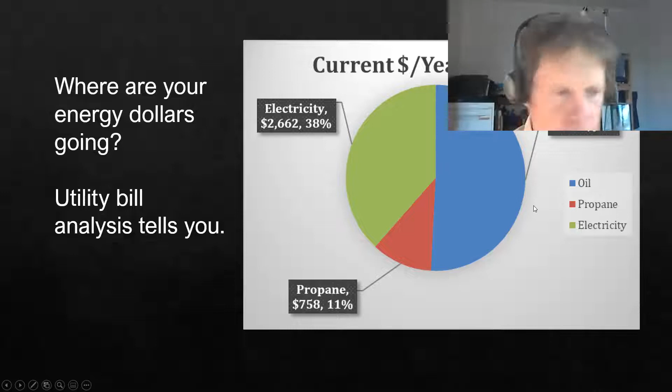Electricity in Ontario is pretty good. It's not too much carbon involved in making electricity in Ontario. There is some. So it's really the fuel of choice for the future for everybody. We're going to have to electrify everything to reduce our greenhouse gas emissions. But as a group, you're going to have to decide what weight you want to put on environmental factors as you're deciding about a building.

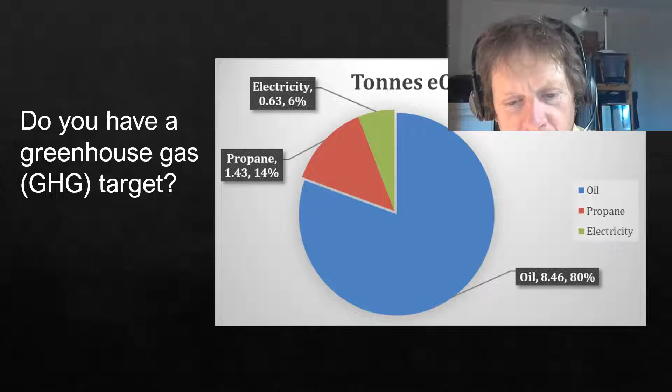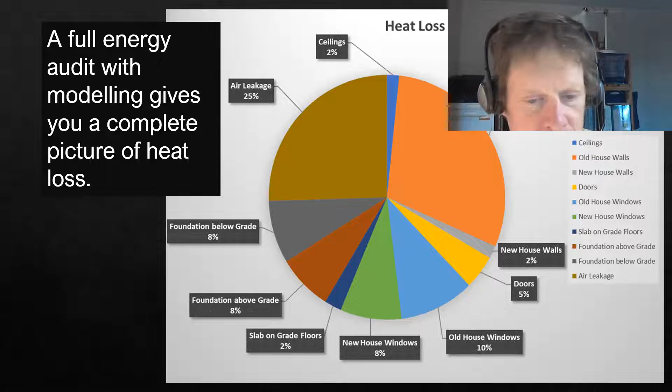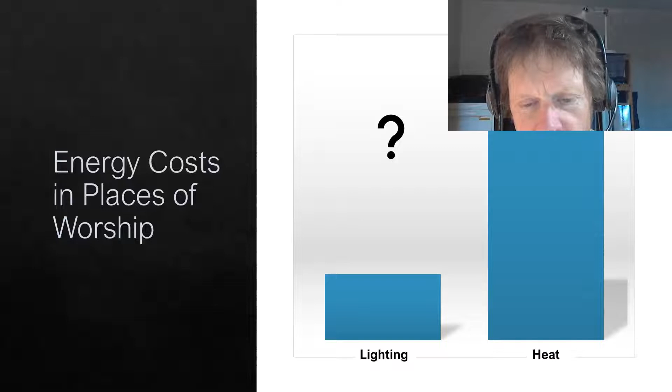Lighting and heat. So most of our electrical loads, unless you're heating with electricity, will come down to lighting. Most churches that I've seen recently have already had quite a few lighting upgrades. There's been some great programs for lighting upgrades in the past few years, and we're not seeing, for the most part, huge lighting loads. If you've already got LED lighting in most places, you're pretty much at the finish line as far as reducing electrical loads from lighting. If you still have incandescent lighting, then there's plenty of opportunities to make changes.

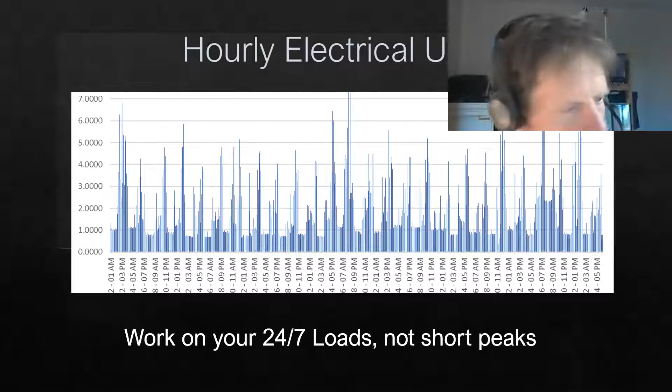One of the great things that you can get these days from your utility bills is a tremendous amount of data. For most utilities, certainly Hydro One, you can get hourly data that shows your electrical consumption hour by hour. So here's an example. The numbers on the left are kilowatts, and we've got a bunch of days here. I don't know how many days. I think every time you see a bump, that's a day. So we've got a couple of weeks here, I think.

You can see that the loads never go below maybe 800 or so, so like 0.8 on this scale, which would be 800 watts. So this is a building that is apparently averaging 800 watts all night long, and that's a place where you want to put your attention with electrical loads. When you look at this slide, everything that's blue is costing you money. So if you spend a lot of time trying to reduce one of these peaks up here, there's not very much blue in that peak. It's a pretty thin line. It didn't last for very long.

The big money to be saved is down here. So if you can take a slice out of this base load that runs all the time, that's a big savings compared to hunting the peaks, which in the case of a church usually happen whenever the church is occupied for worship. It might only be 2 or 3 hours a week, and that can be a peak. Worry about what's happening all night long, every day of the week, and you can get that not from the bills themselves, but from the websites of the utility companies.

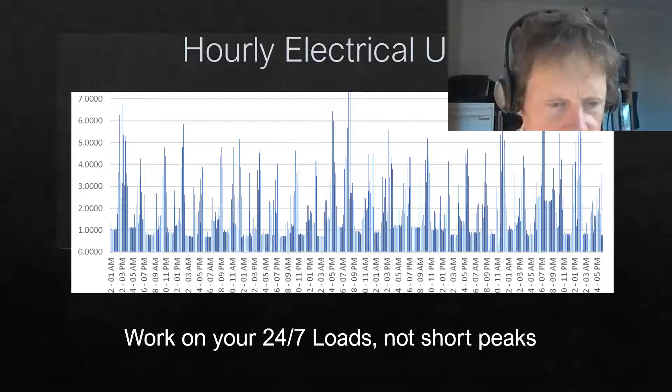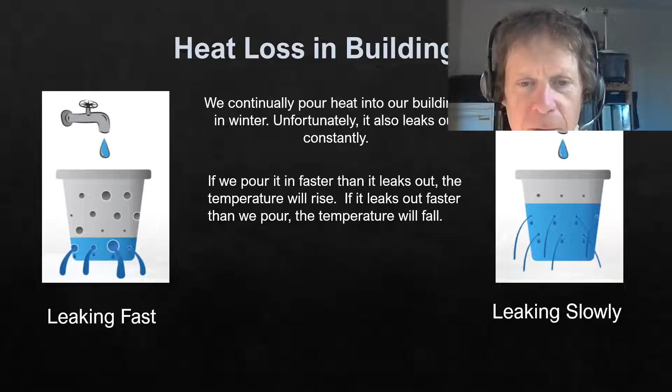Three things contribute to heat loss, and they're all equal in proportions. The surface area of your building that's exposed to the cold, the conductivity of the materials that the building is made of, R value, we say in construction terms, and the last thing is the temperature difference. If you have a big temperature difference between indoors and outdoors, you're going to have more heat loss. But all of these things contribute equally.

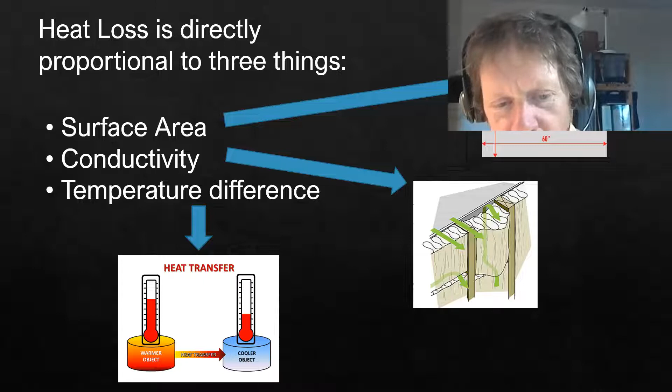They're equally proportional. So this is why setting back thermostats saves us money, because we get closer to the outdoor air temperature. As we get closer, we have less difference between inside and outside, and it takes less heat to maintain that difference. So you can be very aggressive about setting back thermostats, and there is savings to be had from doing that. So those are from thermodynamics. These are the three ways that you lose heat from a building.

Real buildings have a fourth one, and that's air leakage. This is heat that is carried by air. If you have warm air that escapes through the building, through cracks around windows, cracks in the walls, cracks in the floors, there's a million places where it might go depending on the construction type. When that warm air escapes, it's taking heat with it, and that can be, as you saw from the first slide, pretty significant.

Air leakage is driven by three main factors: the wind that hits the building, and the stack effect, which is the tendency for warm air to rise. So buildings will tend to leak outwards at the top, and they will tend to leak inwards at the bottom. If you're near the top of the building, you won't ever feel a cold draft, even though it's leaky, because it's all the warm air from below that's going by.

You may have seen buildings in the wintertime where on the third floor, all the people have the windows open in the apartments. There's something terrible going on in that building. They aren't feeling cold drafts. It's all the warm air from down below that is disappearing out through those windows. And the same is true in real buildings.

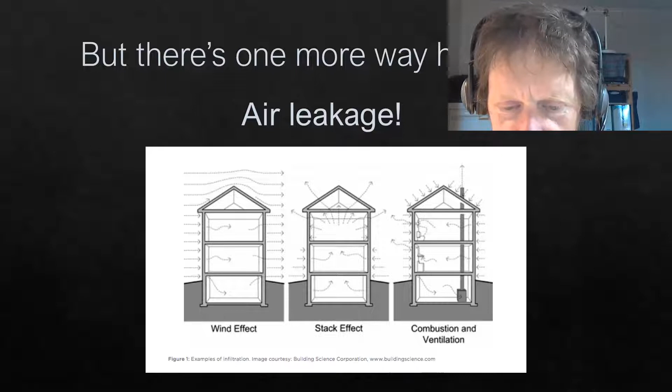The last thing that causes air leakage is if you have devices inside the building that consume air. Well, all of that air has to come from somewhere. And most older buildings don't have intentional balanced air supplies. And so the air typically will leak into the building to make up for whatever is being exhausted by a furnace that uses air, a boiler that uses air, exhaust fans, say in your kitchens or in your bathrooms. All of that air is replaced by air that leaks in. And when it leaks in, it's coming in cold, and you've lost warm air going out.

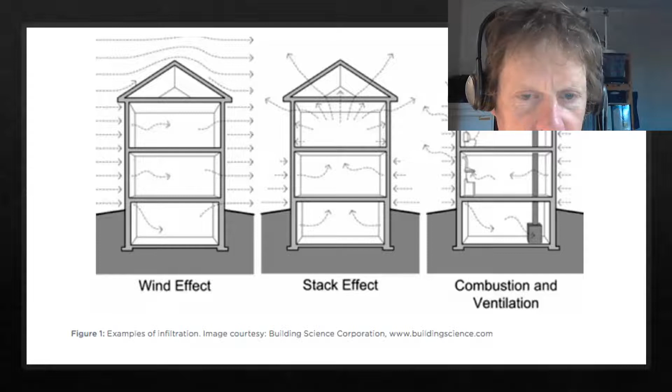It's not expensive to deal with air leakage in many buildings. Sometimes it is, but often the sources are not so numerous, and you can knock it back with foam and caulking and filling obvious places.

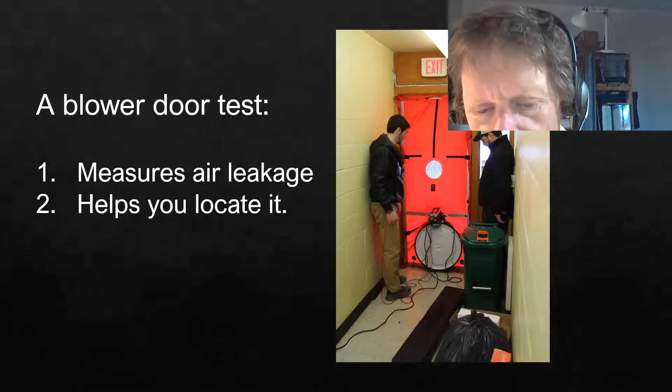I'm hearing some background noise. I just remind people to mute your microphone if you're not trying to speak.

Thank you. So strategies to look at in terms of this. One is to reduce the heat loss. The other one, of course, is to reduce the cost of making the heat. And often in an older building, especially say a stone church, you are quite limited in what you can do to the building envelope. And so at that point, it might be that your money is better spent on coming up with the least expensive way of making heat that you can, rather than trying to reduce the heat loss from the building. And these are individual decisions. There's not a rule of thumb that is going to work for all buildings in this respect. It's just two things to think about. And we're going to do some of each in many buildings.

Managing set points and schedule. Remember that the heat loss is proportional to the temperature difference. So anytime your building is being kept warmer than it needs to be, you're spending money you don't need to spend. Many churches have multiple thermostats. If you can get those all onto Wi-Fi thermostats so that somebody can manage it from home, they can go, well, we've got a group coming in on Tuesday night at 7, I'm going to warm that space up an hour ahead, and I'm going to turn it off when they leave at 8. You can set that all up. There's a lot of money to be saved there, typically, if it's not being managed carefully right now.

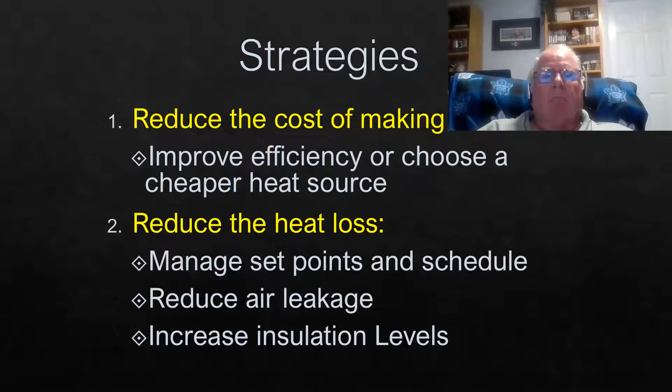And the cost of a Wi-Fi thermostat these days is $120, $150. Don't buy a boutique thermostat like a Nest. You can just get more of an ordinary Wi-Fi thermostat, and if you get them all the same brand, you'll have a dashboard and you can see them all in one place. So managing set points and schedule, the cost of that is very low compared to the return, unless you're doing a beautiful job of it right now.

Again, I'm hearing noise. Please check your microphones.

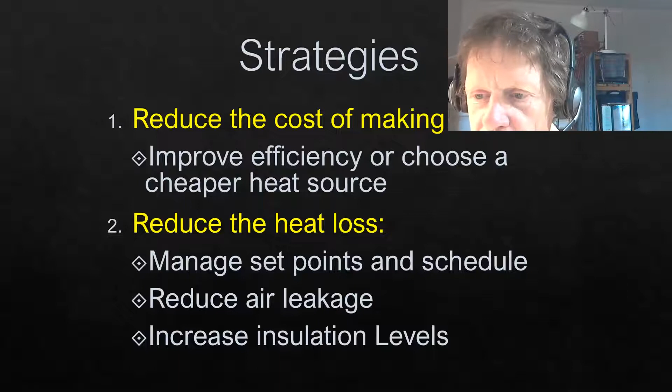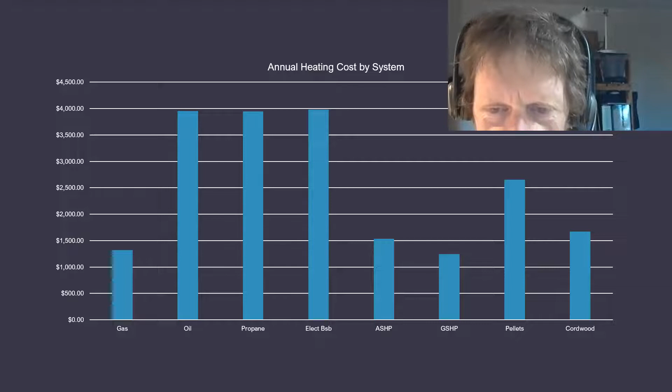Interestingly, here's wood pellets and here's cordwood. Lots of people heat with those at home. Not so many people are heating churches with those things. And the cordwood is about even with the air source heat pump, right? And what a lot of work and mess you have heating with wood.

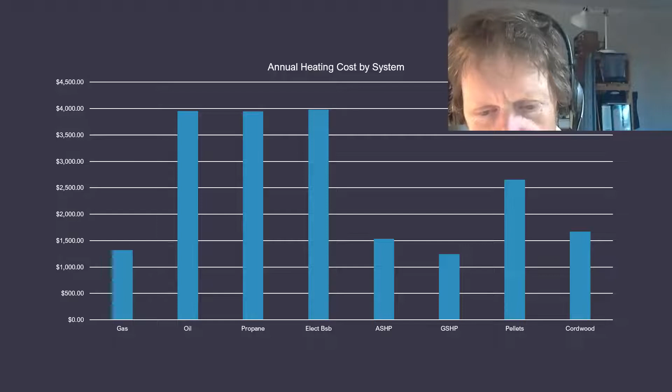So a new house, we've got R values of about R25 in the walls. Sorry, just my camera's bouncing around here. R25 is typical, and more than that even for a new house today. This is older. And what have we got in the stone? Well, if we have 20 inches of stone, which is typical, the R value is only 0.1 per inch. So we're talking about 2.2. So it's 10% of what a new house would be.

In fact, worse. If you've got a solid brick building, typically you've got brick walls that are 8 inches thick and usually no insulation on the inside, maybe a little airspace and some plaster. Your R value is even worse. It could be under 2, right? So these are fantastically low R values. They're very conductive walls. The heat just flies through them. And this is what we're up against if we've got older buildings that are either solid brick or stone.

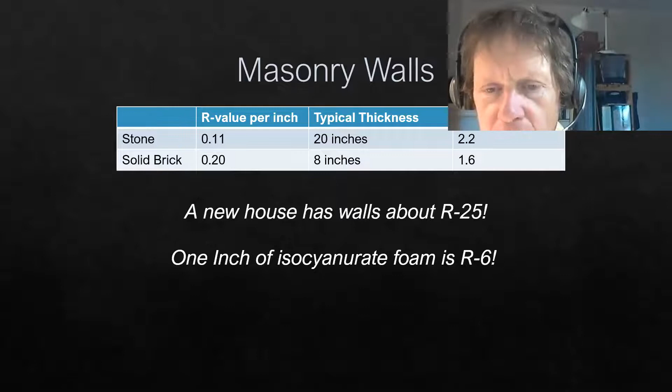Anywhere you have ducts in unheated spaces or sort of semi-heated spaces, that's pretty bad news. And we want to think about a way of bringing the space where the ducts are into the thermal envelope so that it becomes a heated space. And often that's not as difficult as it sounds. You can insulate these foundations on the inside. They're not even huge. If it's a fairly low space, you're not talking about a lot of square feet of walls. And you can insulate those exterior walls.

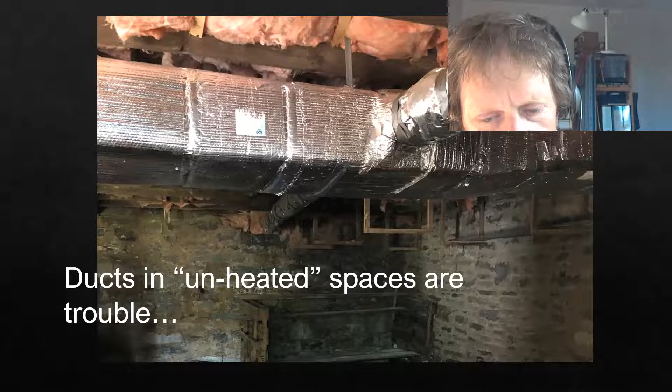Remember, temperature difference is one of the things that drives heat loss. So if you've got the very hottest air inside the duct, it's a good deal hotter than the set point of the room. And you've got that right next to the coldest air. Well, you're going to have a lot of heat loss, aren't you? And look at this insulation here. It's very, very thin. That stuff's an inch at best. It's got an R value of maybe R3 for air that's super hot. So ducts in unheated spaces are trouble, and there's different ways of dealing with them, but try to avoid that and try to deal with it in a smart way if you do have it.

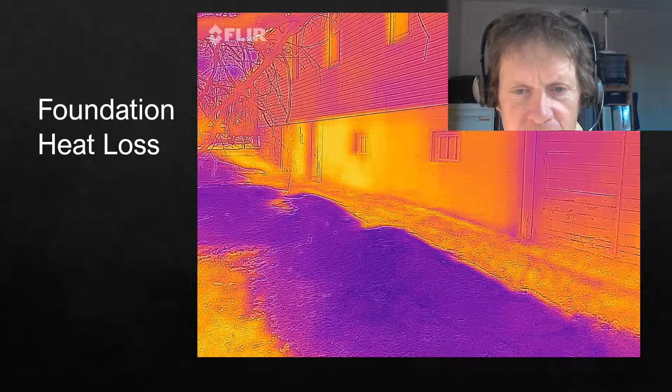So the drier that wall is, the better, and the condition of the mortar also matters. If you've got good mortar joints and the wall is relatively dry, then insulating on the inside is not going to be much of a risk. If water is continually hitting that wall and the mortar is in poor condition and you insulate on the inside, you're going to accelerate the degradation of that wall. So again, there's not a rule of thumb here. It's very situation dependent.

Insulating stone on the outside is ideal from a building science point of view, because then we bring it into the building envelope, it stays nice and warm and dry. But hardly anybody wants to do that because the stone is nice to look at, but there are situations where it does make a lot of sense to do that, and we've done it in places. I hope that answers your question, Philip.

Lots of high ceilings, of course, in most of our places of worship, whether they're church halls or the sanctuary itself. Dr. Ritchie had a question about fans and are they valuable or not. Most churches do have fans up in these spaces. And he kind of answered the question himself too. If the fans are powerful enough to actually push the warm air down to floor level, then yeah, they're useful. If it's too high and the fans are going too slowly, then you're just wasting your money on the electricity of spinning them around.

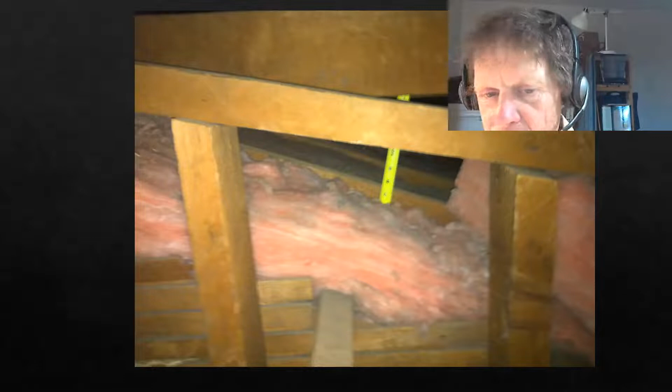Here we are measuring insulation levels in a sloping ceiling. So some churches have sloping ceilings that you see on the inside, and there's actually attic cavities above them, and you can get in there and see what you've got, and you have plenty of opportunity then to increase insulation levels because there's a space that you can move around in. Houses these days have 12 to 16 inches of insulation in the attics, right? In these churches, you're lucky to find 6 or 8.

When you're in the room, it just looks like another interior room, but in fact, it's almost at outdoor temperatures, right? Because there's no heating out there. And so when you have something like that, decide where your thermal boundary is and defend it aggressively. Don't do sort of a half job on the door and a half job on the wall outside. Either decide that this is my thermal boundary or that's my thermal boundary and put some effort into it.

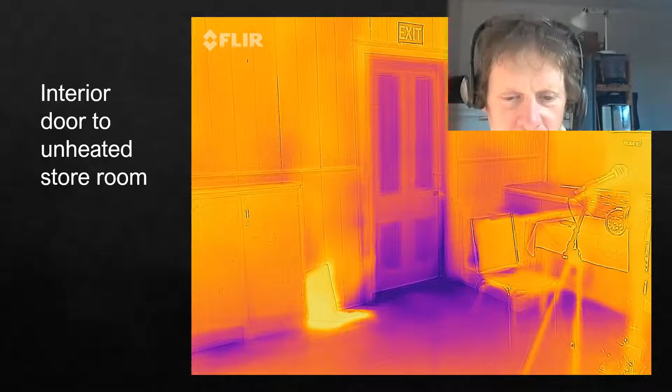Lots of places you're going to find things like this where ceilings meet walls. Some of this is air leakage, and that can be fixed relatively easily. Some of it is flaws in the original construction. And all buildings will tend to have more heat loss at these corners. Also, it can be the fact that the heat's not getting there. You have to be careful with infrared images. It can be a question of heat distribution, not heat loss.

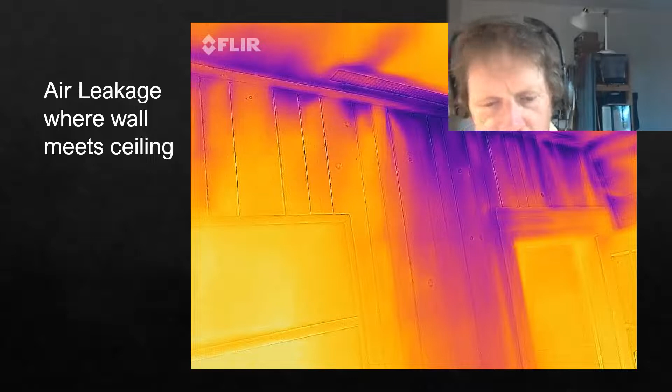The insulation's been removed by a heating contractor who was running a duct or bathroom exhaust fan or something, and they didn't put it back, or there's some problem with the insulation in that particular space. Easy to fix if you can get into the attic, right?

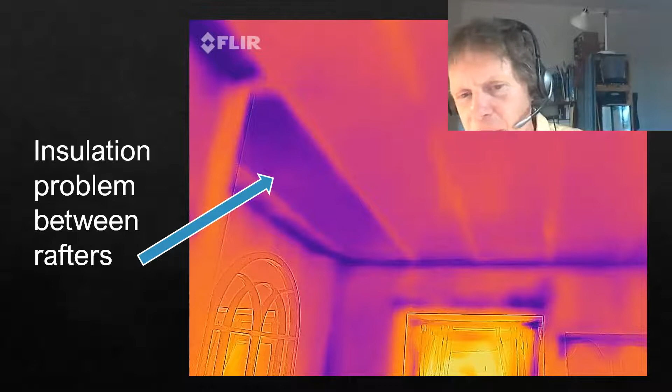So here we come to making heat. And so as I showed in that earlier slide, the least expensive ways are going to be natural gas. The air source heat pump wins for environmental as well as cost of energy. And the ground source heat pump is a little bit better, but the cost of installing ground source heat pumps is prohibitive right now, certainly not worth the extra little bit of savings that you're going to get.

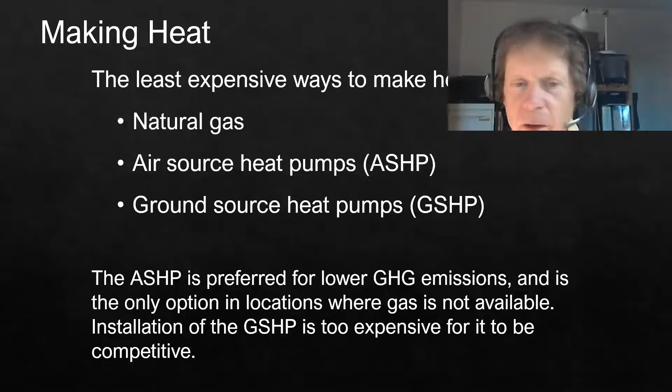Air source heat pumps have improved dramatically in the last 10 years. We now have what's called a cold climate heat pump, and it's designed to operate at temperatures down to -20 or even colder. There's different ways of configuring heating systems if you move to these heat pumps. So this is a heating head on the inside, and this will be an air source heat pump.

And we might call that a VRF, or a variable refrigerant flow system. But they're ductless. They're also called ductless systems, obviously because there's no ducts. So the heat just comes straight out of these. They're very quiet. There's no moving parts in there except a fan. There's a coil that gets hot from the refrigerant that's running through it, and a long fan.

They're pretty quiet, and they also provide cooling, which most of us have never had in our churches. So for the same price, you will get cooling. Of course, it's going to cost you some money to operate it, but if you only operate it a little bit, it won't be too significant. So that's one way of doing an air source heat pump.

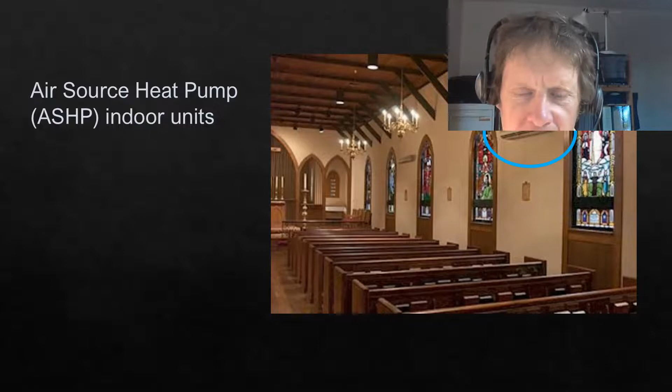Another way is to put it into your existing duct system. And a third way is to integrate it with a hot water system and use a heat pump that makes hot water. They are the least common of all, a little bit hard to find contractors that know how to do that.

So if you had more money to spend, you could have all of these things be one central unit, and you could put it around the other side where it was out of sight. But it's less expensive to have the outdoor unit paired with the indoor one right behind it.

So if you're shopping on air source heat pumps, as Dr. Ritchie has been doing, make sure you're looking for cold climate heat pumps. The number to compare to look at how good they are at heating is this number called the HSPF, Heating Seasonal Performance Factor. That will allow you to kind of compare apples to apples when you're looking at two different units.

The output, so when it gets colder outside, it's harder to pull heat from that air. Two things happen. One is that the capacity of the unit goes down. So if it was 80,000 BTUs per hour at -10, it's not going to produce that much heat at -20. The other thing that happens is it becomes less efficient as the temperature goes down. So for the heat that you get, it will cost you more per unit of heat than it will at the shoulder seasons when it's not as cold.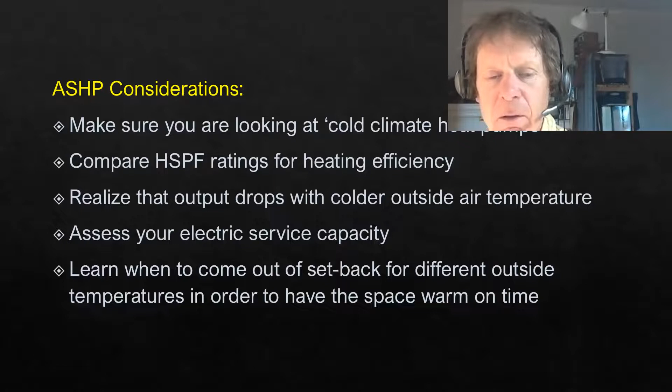Contractors may tell you, don't set these things back, just let them run all the time. Well, if you want to get good savings, you've got to set them back. You've just got to learn when is the time to change the thermostat setting as you need it for occupancy.